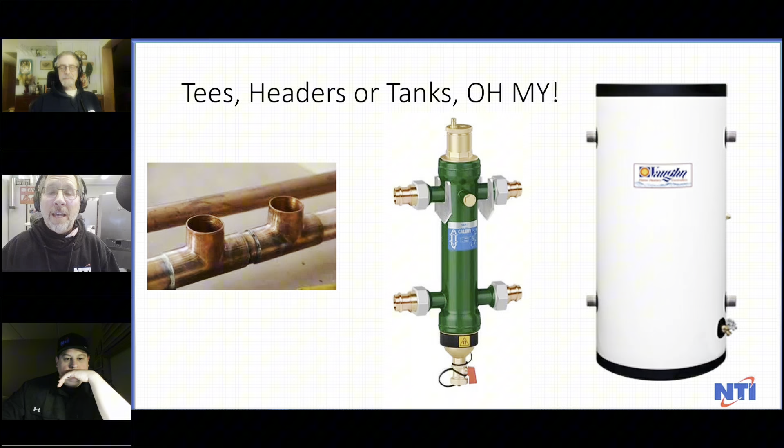Exactly, but in reality folks, it's not these types of T's, headers, and tanks. It's actually these kinds of T's, headers, and tanks. So tonight we're going to dig a little deeper into why and when you'd like to use two closely spaced T's, why you'd want to use a low loss header, or when should you use a buffer tank. Because all of them fit everywhere just at the right time, right? So that's what you have to decide as an installer/designer and system supplier. You got to do it.

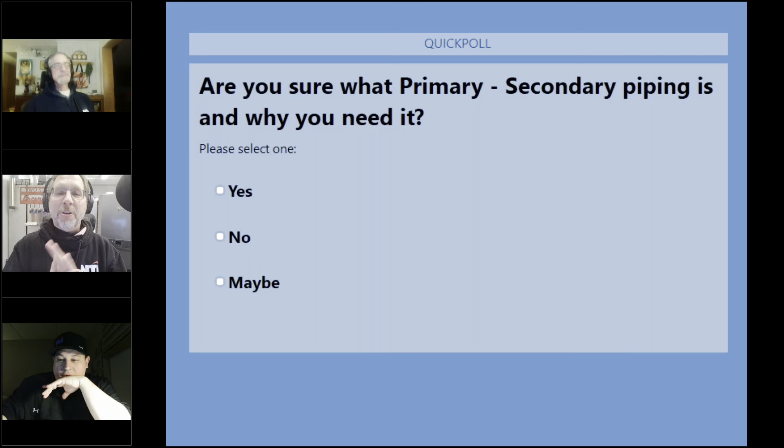Wow, cool, excellent. So we got a ton of yeses, right? We got a ton of yeses, but we got 30% basically that aren't sure. Good. Close that poll, would you, Jason? Yeah, I would close, while you're trying to find your music, just close the poll, would you, for God's sake? There we go, I was answering a question. I ain't worried, but you need to convince that other 34% why they need to. So that will be the task at hand tonight.

So let's take a look now. Tonight we're going to be talking about primary, secondary, and how this all started and where I was introduced to it, and not even know I was introduced to it. So you read the book. But the goal of your T's, your low loss headers, and your buffer tanks are to create a primary secondary circulation so that your boiler can have one flow and your system can have another, and the two not intertwined with each other except for when we're transferring the heat out to the system.

So now let's look at the way we used to pipe things here. So here's a standard atmospheric boiler, a standard atmospheric expansion tank, a standard scoop that we know had at least 18 inches of pipe before it. We had the pumps on the return. We had the check valves on the supply.

And these, notably, when I got into this business, were as big as a small VW or a VW bus, actually. We took those huge boilers out and we put in what's considered large boilers today, which would be your standard 4, 5, and 6 section cast iron boiler weighing in at about 800 pounds apiece.

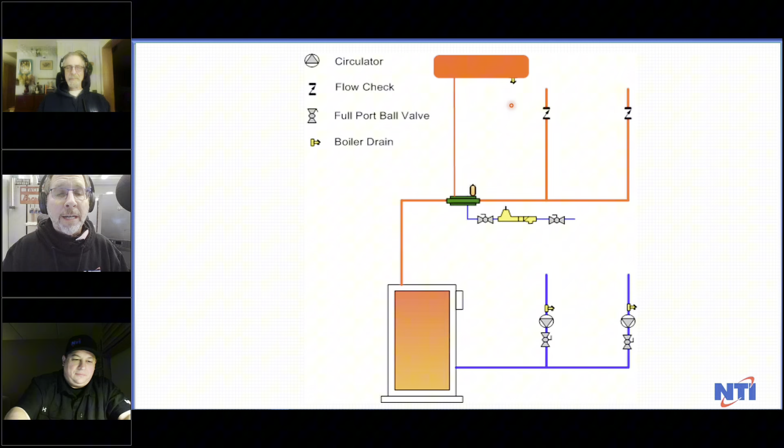And we had a problem because the systems had 3 and 4 inch mains, all the cast iron radiators, and had a ton of radiators and water in it. And that water coming back to the boiler would create condensation, which you don't want a cast iron boiler to do, because our return water could never get over 130 degrees to allow the boiler to get out of condensing mode. So this is a small problem.

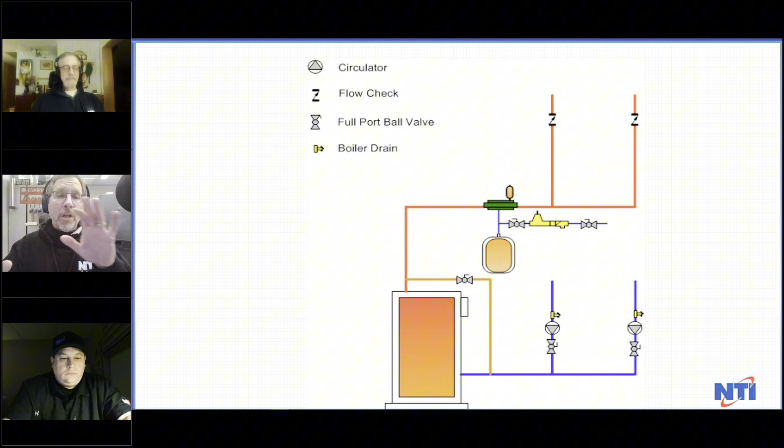So what we did back then, and you guys may know, is we put in a bypass. We simply put in a bypass around the boiler so that a portion of the water could go by the boiler and a portion of the water could go through the boiler, but the boiler could get up to 160 to 180 degrees, get out of condensing mode, and supply that temperature slowly to the system, so the system would heat up slow and come to temperature. So this was the actual early days of primary secondary without using pumps, because with a cast iron boiler you didn't have to maintain any kind of flow rate.

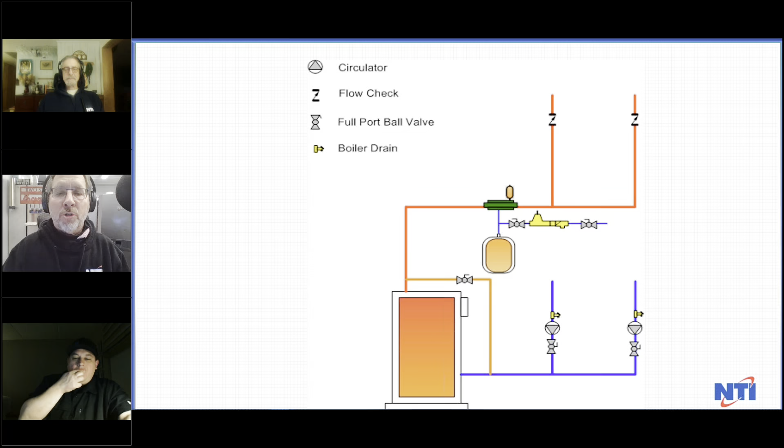Today we have to. But then we did something really weird after that. So then along came radiant heat and outdoor reset and Tekmar controls and all that cool stuff in the 80s. And we had to come up with primary secondary. So we came up with this for primary secondary.

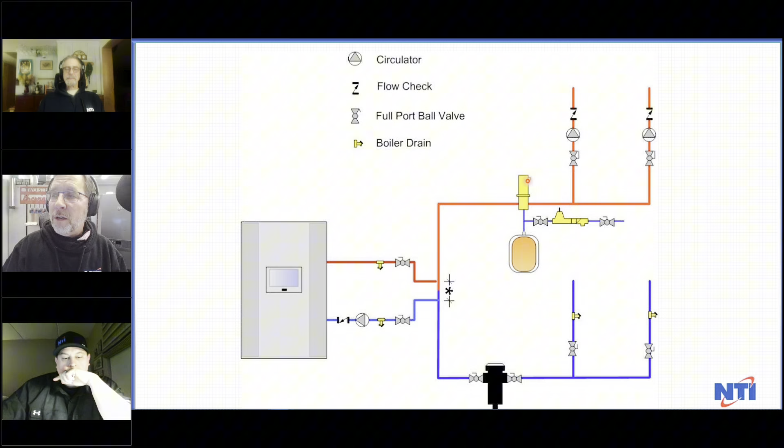We save you a pump, and now we just pump the boiler into two closely spaced T's and off to your system. Here's your two closely spaced tees, which I just addressed the distance apart. You can see I've now added a magnetic filter to the return, a diaphragm tank, a nice fill valve, a microbubble air absorber. I put the circulators on supply because I know that's the best place for them. If you have a question as far as why I placed the pumps here and on the return, yes?

There is a question, and I don't know if you're getting into it, but there's a question from Bob Clark about why Lars shows a ball valve between the two tees. I know you'll probably cover that, but I just wanted to ask. You'll just have to wait a second, young man. You'll just have to wait a second. I didn't know if you were getting there. I'm just saying, hold your horses, little boy. Hold your horses.

So anyway, here's how primary secondary is done today, where our circulator for the boiler makes the pressure drop and pulls the water in, but the circulators on the system don't affect the boiler flow.

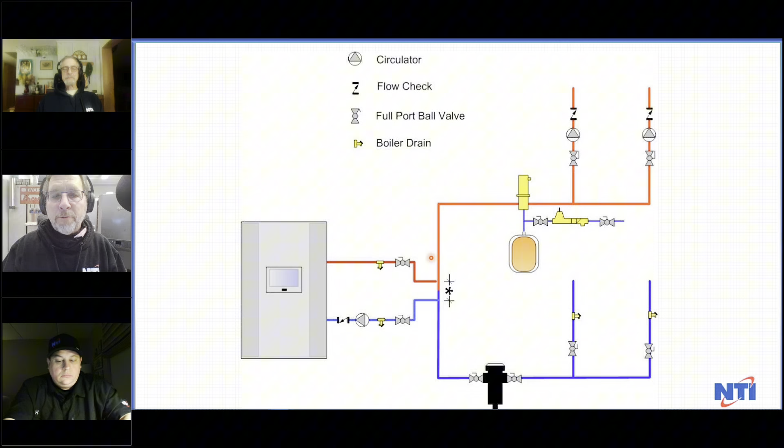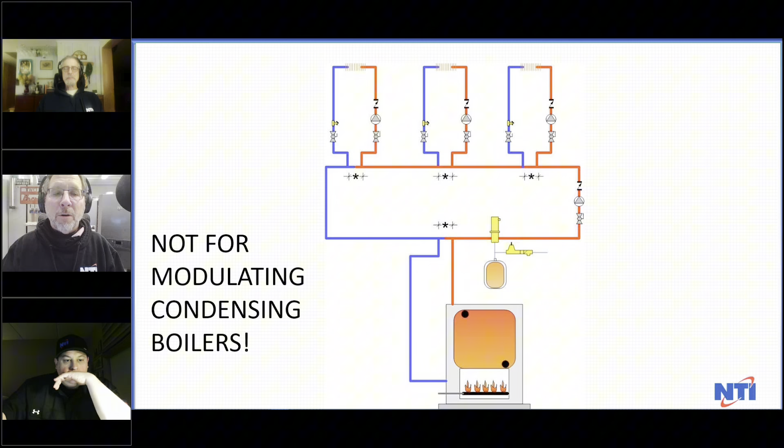I even tried at 12 inches to put gravity traps in, meaning I dropped the pipe down off the main header, dropped it down 18 inches, went across and came back up, and I still had flow, proving that it was flow, not gravity. So 4 pipe diameters work, which is why we're always talking about 4 pipe diameters.

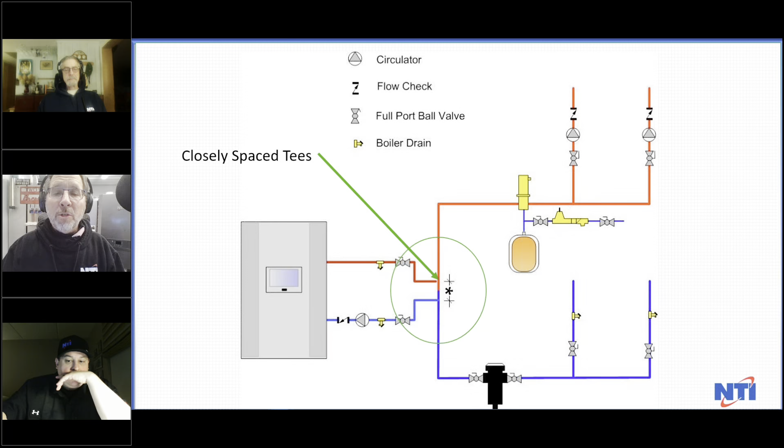So there's your closely spaced tees that we're always talking about. You can see now there's no primary pump - there's a boiler pump and there's system pumps. So when we talk about what pumps are whose, please, we want to know if you have primary or secondary, but we want to know what pumps are where.

So you talk about valves in between, and here's 3 different kinds of closely spaced tees you can buy. Of course, you can buy this simple Nibco sweat tees, put them in, off you go, nice and cheap and easy. So far, so good.

Then, down below, you have the Webstone with the valve in between, and the reason for the valve in between is so that we can power fill the boiler. We can turn that off and force water through the boiler to purge it and get it out to the system. With us, we put a valve on our low loss header because that way you can use the internal pump to pump the system if you wanted to, if you had less than 5 gallons a minute at 9 feet of head. But that valve is there so you can purge the system.

And on the top right-hand corner, you see that I used the closely spaced tees with the valve in the middle, and of course I put the purge tees on the return, going with the expensive Webstone. So just to give you an idea.

Now, when we start talking about flow on closely spaced tees, I've left a little bit out here. If you notice on all these pictures I've shown, the bottom left doesn't show you any piping, but on the top right-hand side you can see there's a distance of straight pipe to either side. People often ask how much straight pipe should I have before and after. Personally, I prefer 18 inches of straight pipe before coming back from the system, before the return tee, and at least 9 inches coming out.

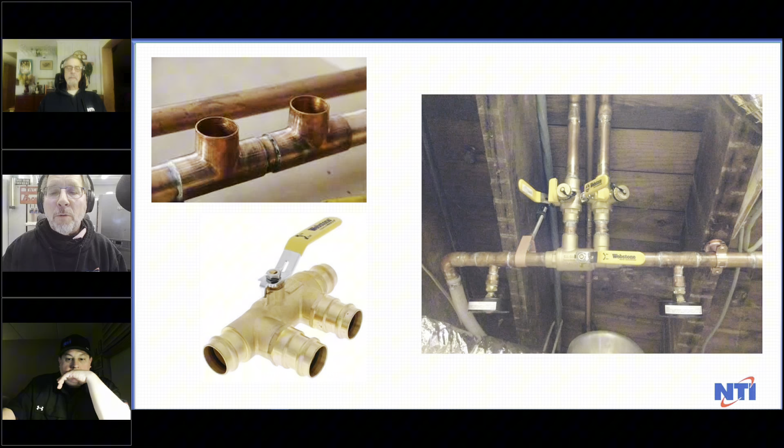I don't know if you know this. When water comes through an elbow, the same... Where'd you get that drawing? Would you let me do my explanation? Why? That is perfect, that's perfect. Okay, well shut the front door, will you? This is courtesy of heatinghelp.com. Read the bottom of your screen, will you? Of course it's perfect, he wouldn't have put it there if it wasn't.

So let me get back to why we want that distance. You got some questions you got to answer too.

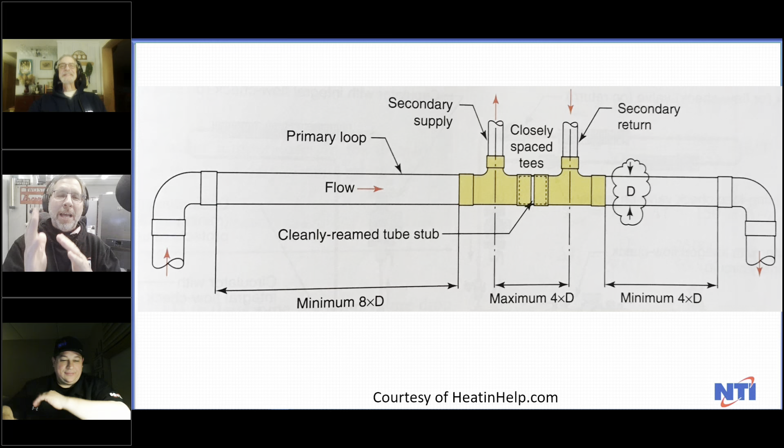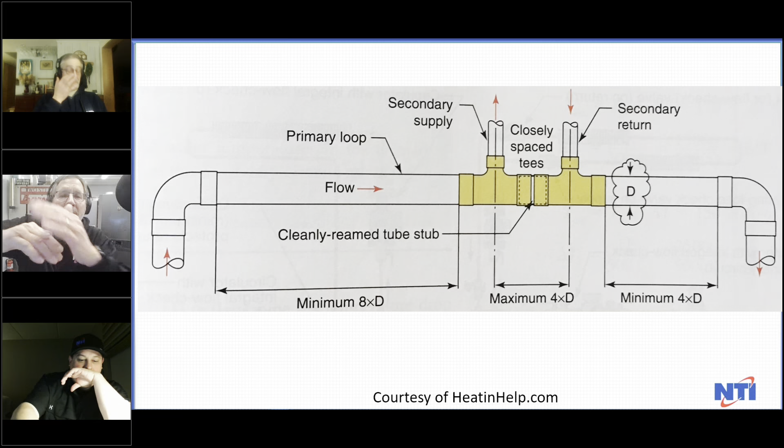When a fluid comes through an elbow, and I don't care whether it's air or water, whatever comes in goes out, nothing's left behind, right? Well, the problem is the velocity on the outside is moving much quicker than the velocity on the inside of that turn because it has to keep up. When it comes out of the elbow, it's twisting, and the two velocities are creating a twisting motion going through. Think of it kind of like a chocolate and vanilla swirl at Mr. Twisty in the summer, right? That's what it looks like for about the first 8 to 10 inches.

So in this picture, it doesn't use dimensions like 18 inches and 9 inches, it goes back to pipe diameters, where our closely spaced tees need to be 4 pipe diameters apart. So if it's 1-inch tubing, it should be 4 inches apart, center to center. But if the main is 2-inch diameter, it's got to be 8 pipe diameters away, or 16 inches, before you get to the first tee in the direction of flow. And coming out, you need to be a minimum of 4 pipe diameters from that. So this is the ideal way to do it.

I can't tell you how many times I'm on a job where there's an elbow right at one tee and an elbow at the other going to the system. Even if the tees are 4 pipe diameters apart, the system pumps start to help the boiler pump, and now you're no longer hydraulically unlinked. The system flow starts affecting the boiler flow, and you get low delta T's, and the boiler thinks it's revving up too much, so it kicks back, and everything starts to fight each other. You get overheat situations, no heat situations, low delta T situations, all this trouble, not because of the boiler, but because of the way you piped it.

I watch guys who do this, and they turn the circulator up inside the boiler, which is exactly opposite of what you should do when the system pumps are adding to the flow of the boiler.

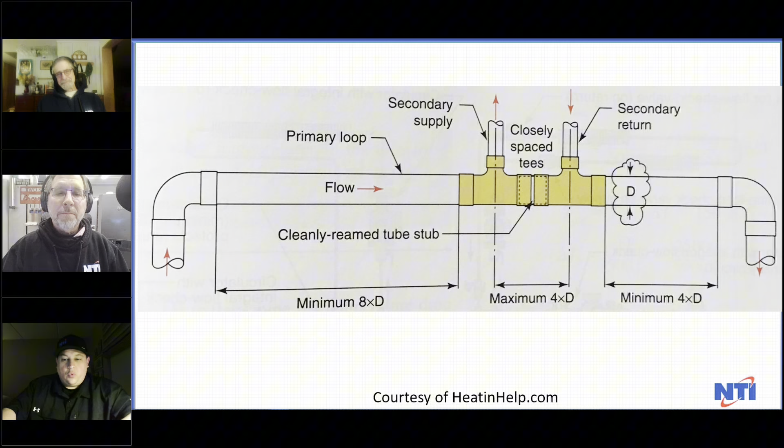The only way that's going to happen is if you follow the rules, because if you locate that elbow too close to the tee, there's turbulence. This is all about creating no pressure drop, not putting it in an area where there would be a large pressure drop, letting the water maintain its own temperature difference and flow.

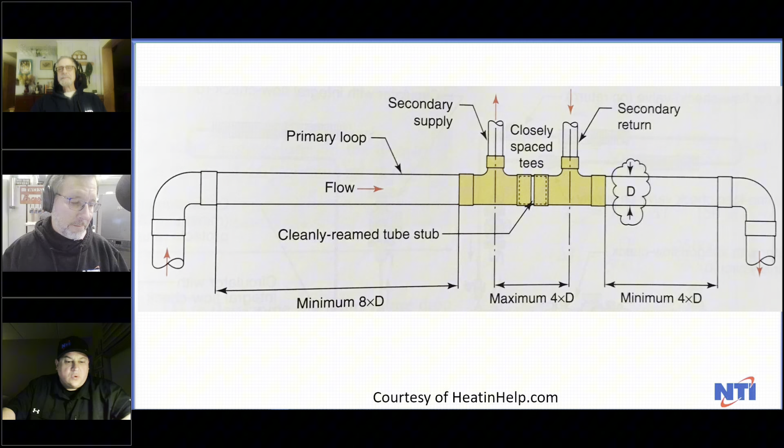Tom Donaldson had a question - taught in Navy school always to put the pump pushing through the loop, not pulling. I'm a little lost there - pushing through the loop? Navy guy always pulls the loop. What's the advantage of pushing through?

Putting the pump on the return instead of on the supply is what I'm getting out of that question, same as what Mike had asked - where do you want to put the circulator, supply or return? You guys always want to put it on the supply.

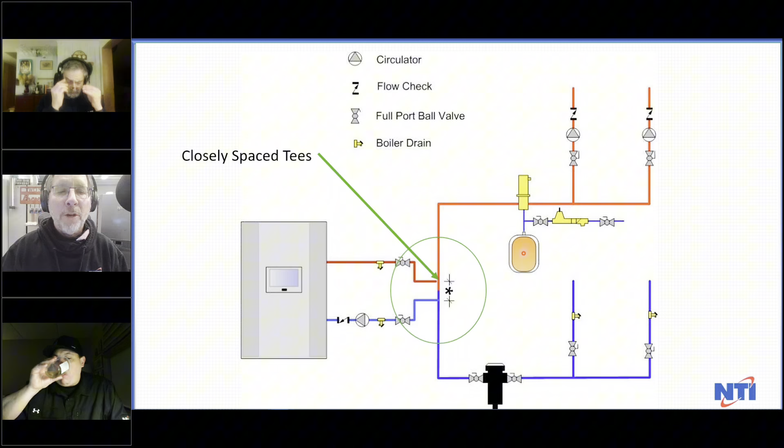Pump away from the expansion tank, all the time. We talked about how a circulator works by increasing pressure on the outlet and decreasing it on the inlet. But we can't compress water, so our expansion tank is our point of no pressure change - your system pressure is created right here. If you're running a 12-pound system, you want 12 pounds of air in that tank; if 20-pound system, 20 pounds of air.

So off the circulator goes, it increases pressure on the outlet, comes around still increased, gets to here, says uh-oh, it's 20 pounds - and it drops in pressure, so now you have decreased pressure from here to the circulator.

Every commercial job ever specified has had the circulators on the supply, except one I was on where they screwed up the drawings, admitted it, and had to pay in errors and omissions to move their two base-mounted pumps to the supply - because the system wouldn't work in an 8-story building with the pumps in the basement on the return. It was dropping pressure so much at the top that it kept getting airbound and not flowing - just sucking air up there. You want to increase the pressure whenever you can, not decrease it.

Did that answer his question? I texted him, I emailed him - having a tough time talking tonight, Jason, maybe that Tito's isn't working for you, pal. No, I emailed him to make sure we were asking this right because I couldn't understand his question - I thought, like Ted, he was talking about the return.

But now we got a couple more questions that came in.

Why not put the expansion tank on the return? This question is from Timothy. Why not put the expansion tank on the return?

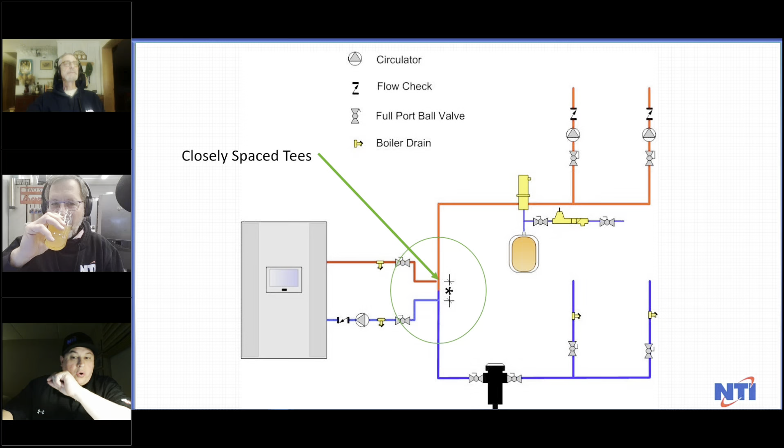If you put the expansion tank on the return, you need to understand, depending on the location of the three-way valve, you may isolate that expansion tank. Not in this particular application with closely spaced tees. Just remember, no matter where you put it, the circulator always has to reference that expansion tank, so don't pump into it, because you'll change the pressure.

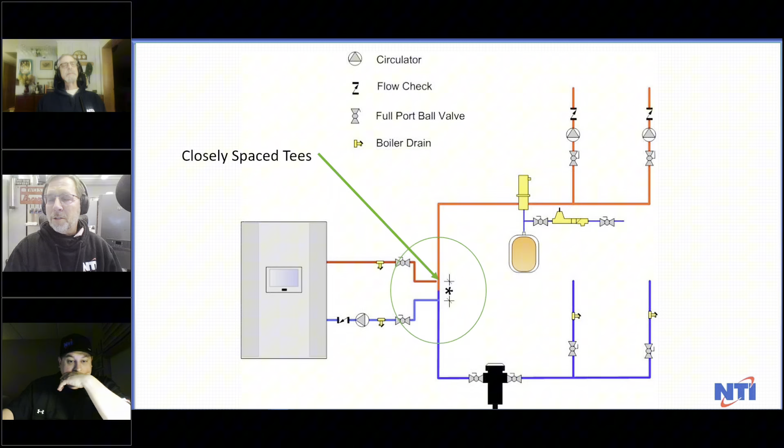So the next reason you want to put the expansion tank where the air separator is, on the hot side, is because gas cannot hold onto a hot liquid. It dissolves more, better, and deeper into a cold liquid. So on the hottest side is where the air will come out easiest. You always want your expansion tank there because you want it to be the point of no pressure change, and that's also where you want your fill valve.

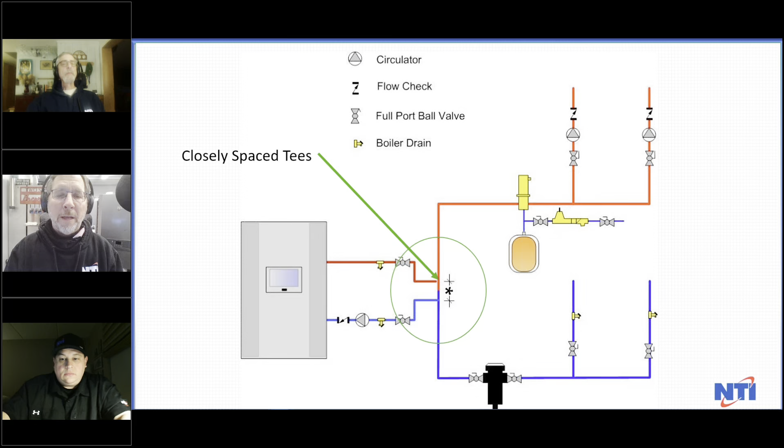If we want to get deeper into the positioning of fill valves and expansion tanks, that's a whole different class. But it's a good question.

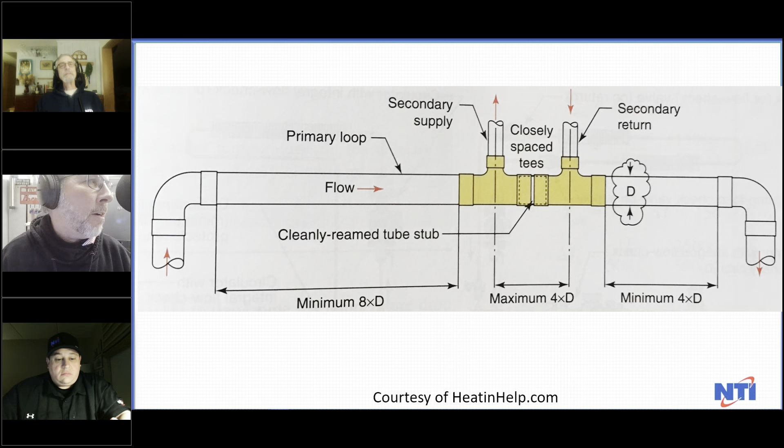I suggest Dan Holohan's book on pumping away. And to answer the question, the tea is trying to help out my sore throat from talking for a couple days. But that's a great question, Steve.

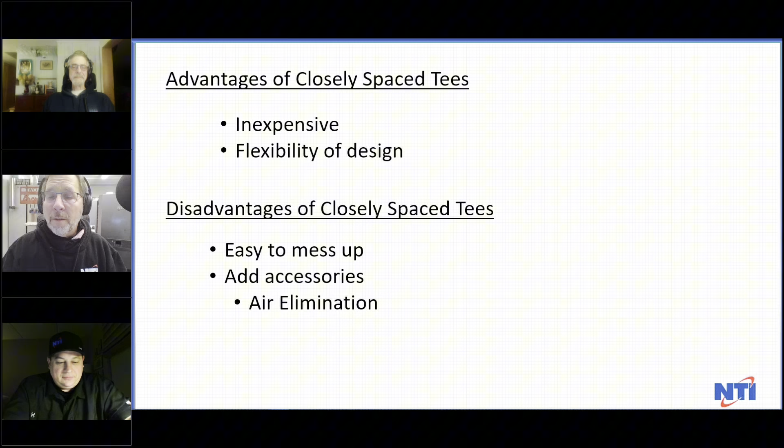They're easy to mess up - you don't put the piping in correctly, and you don't realize you've screwed up by not having the right pipe distances. You have to add accessories like air scoops, dirt separators, and boiler magnetic separators - things like air elimination, magnetic separation and dirt collection aren't part of it. And it can lead to boiler short cycling, which we're going to talk about in a minute.

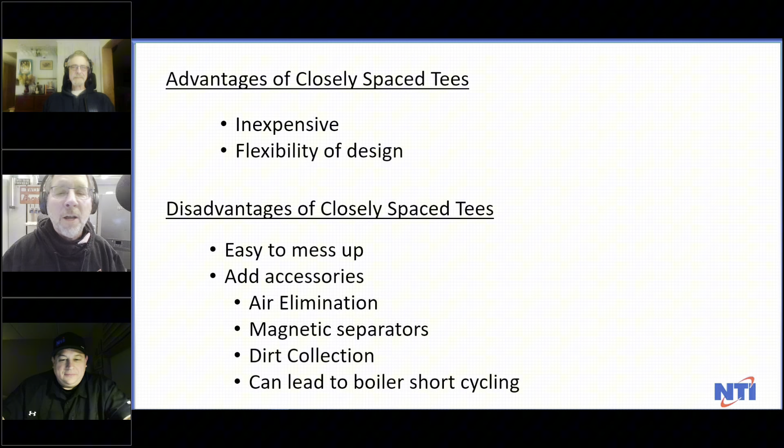Poll question number 2 has been launched: do you keep the proper distance before and after your closely spaced tees? There are three choices - always; until today I had no idea about spacing; or if I have room, and we'll take the consequences.

Okay, here we go, 45 seconds. I'm trying to play Jeopardy with you, but it's not working. You never did find that music, did you, Jason? Oh, I got it. There you go, please help me God. Is the minute over yet? Okay, it's over. Jason? All right, who's the lady who does it? What's her name? Don't even try.

So 65% always, 19% said until today. I had no idea about spacing, and 16% said if I have room. Cool, okay, yeah, and that poll.

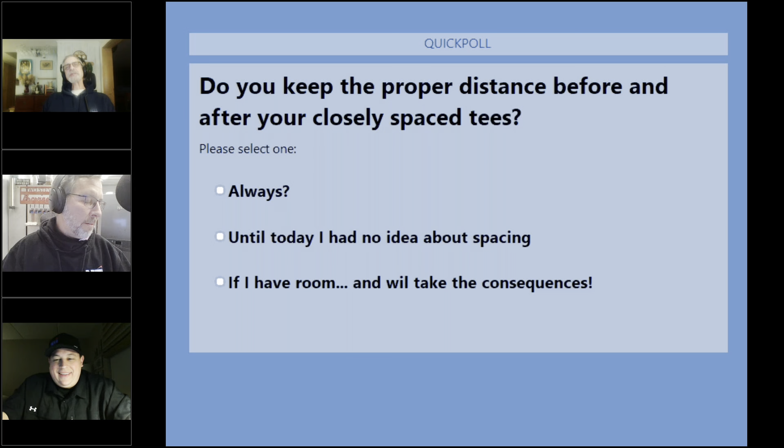The one confusing thing about the poll is that the 65, there was a question mark after always. Seems like the kind of thing you need to be sure about or not. Well, you could buy a manifold, you could get a manifold. Hey, I was not drinking or just coming back from Foxborough when I made those questions. Okay, so let's not go there.

That's right. So we just talked about closely spaced tees, and now I want to talk about low loss headers. Notice the system has really not changed much.

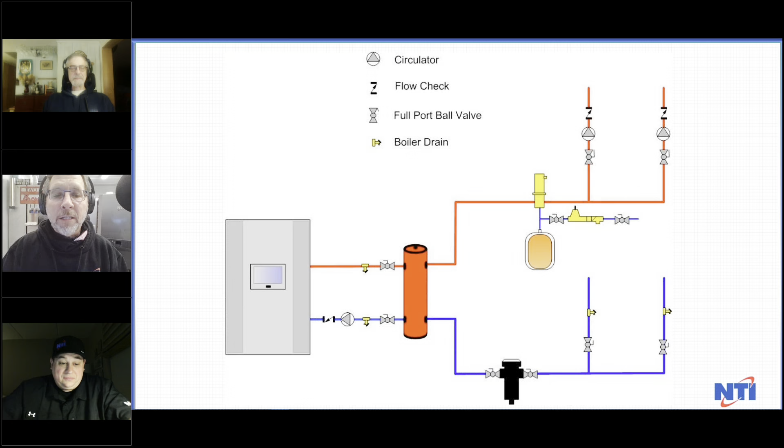But a low loss header gives you so much more flexibility. One, if you get a large low loss header with a large diameter, it will add gallonage to the system so you can help prevent short cycling if you have a microzone. Two, it can give you air elimination. Three, you don't have to have distances before or after it because it's built so it can go in and out correctly. So now all you need to know is that this is vertical, and attach your pipes going into it. There's no distances needed between elbows, none of that, but there is a cost problem, isn't there? So there's your low loss header.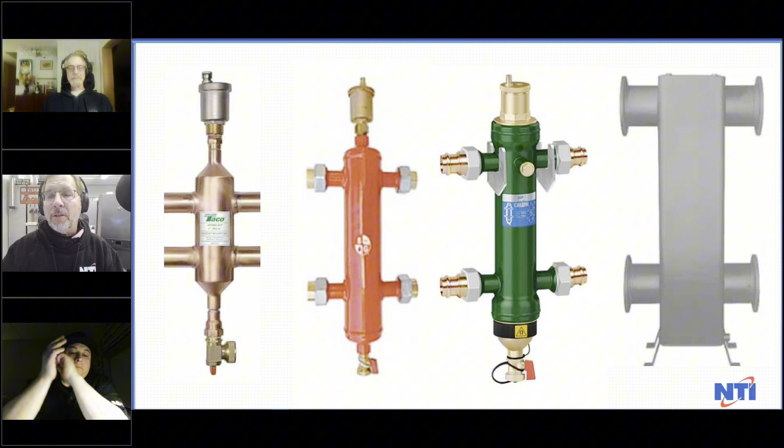Of course, there are some difficulties with it. Poll question number 3 - here we go, and there's some good questions on it. Maybe we'll take a look when we launch poll questions. Have you ever used a low loss header? Yes, no, or hell no?

Too much money. Please, Jason, you said you wanted it, I'm giving it to you. I love Bill McKay, see some of the stuff he puts in there. I'm sorry, I shouldn't be laughing. And Bob Clark, of course you can build your own low loss header, for God's sake. Hell yeah, it's cheaper, that's the question I like.

Right, it's how much does how much does 2Gs cost you? Well, that was listed as one of the advantages, that it was a lot less money.

Yes, all right, there we go, time's up. 59% say yes, they have used a low loss header. 38%... well, the numbers just changed, some of the no's became yeses.

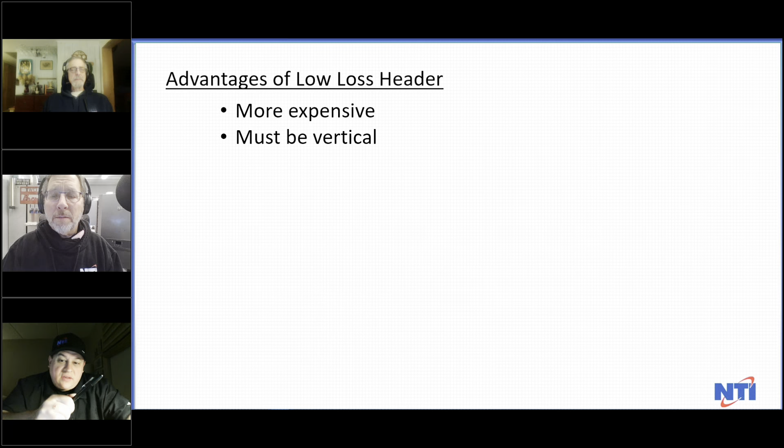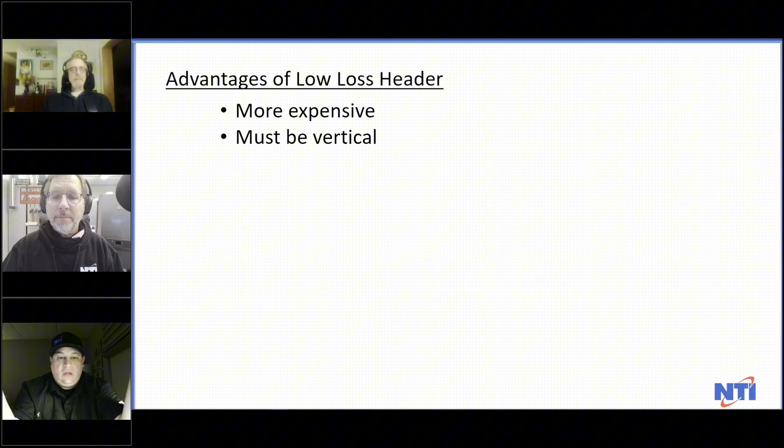So let me ask you this question. As a contractor, Ted, and Steve, you as a wholesaler and ex-contractor, what would you rather do? Put a separator in with a magnet and the whole kit and caboodle and not go back for a problem when the freaking boiler is plugged solid, or have flow issues because it wasn't piped correctly. That's all I'm saying about hydraulic separation.

Well, to answer your question, Jason, it depends. To answer exactly your question, it depends.

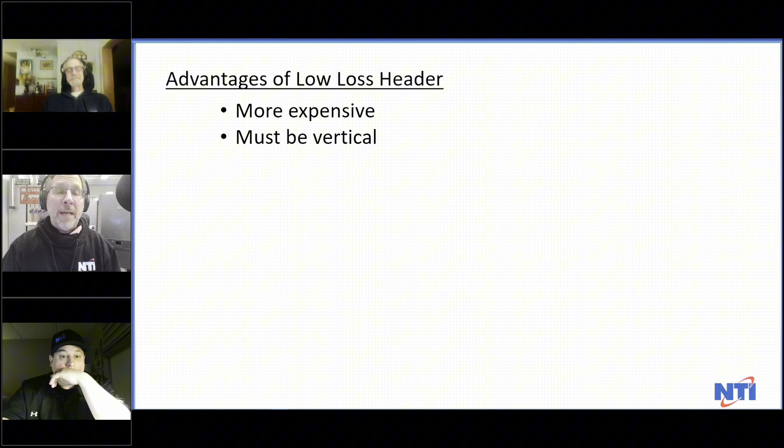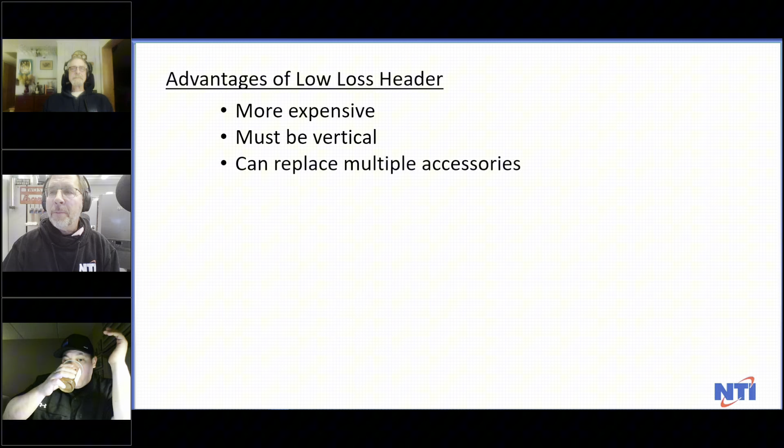A low loss header must be vertical so the dirt can separate out of it and the air can go up. That's common sense. All low loss headers have an air vent on them. Doesn't mean they're a microbubble air absorber, it just means they all have an air vent that takes out air that gets into the low loss header. It can replace multiple accessories, like going with the SEP 4, the air scoop, the dirt separator, the magnetic filter. It can help with short cycling if you build a large one. You could use something out of giant square tubes and build a low loss header that's somewhere in between a low loss header and the tanks we're going to talk about. You could do that and it could help you with microzoning.

The disadvantages of a low loss header: money. It's simply money and design. You've got to have a place to put it.

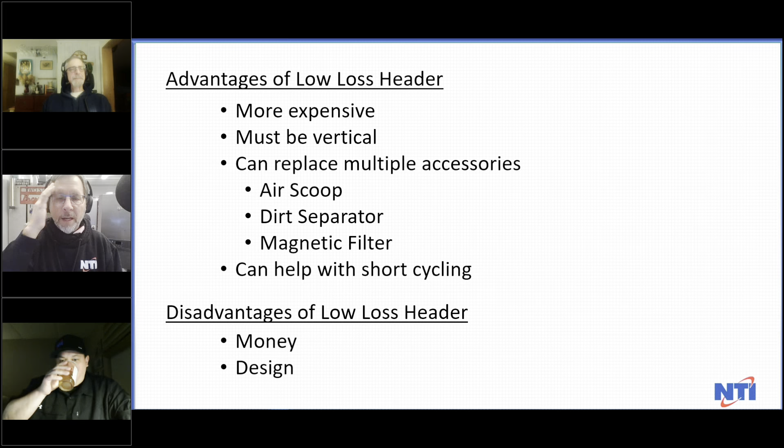That's a value proposition, though. In other words, if you believe in it and you can articulate why you believe in it, people will buy it. It's always about confidence, as we went through two weeks ago, right? Yep, sell the job and make it right. So you have to believe, first off you have to believe that it's the right thing for your job. Absolutely, without a doubt, Ted.

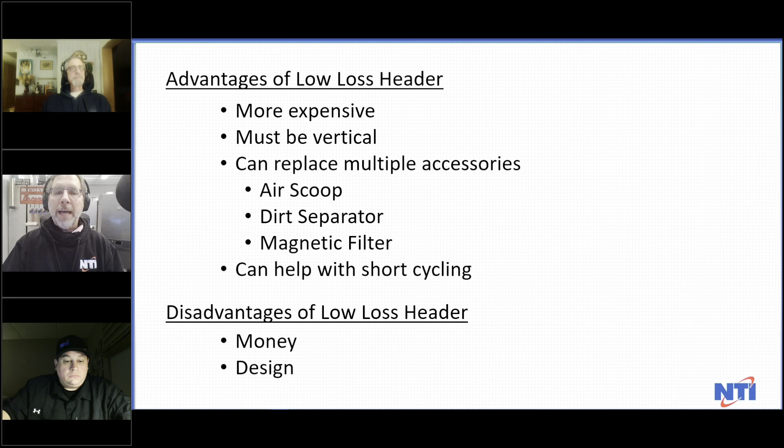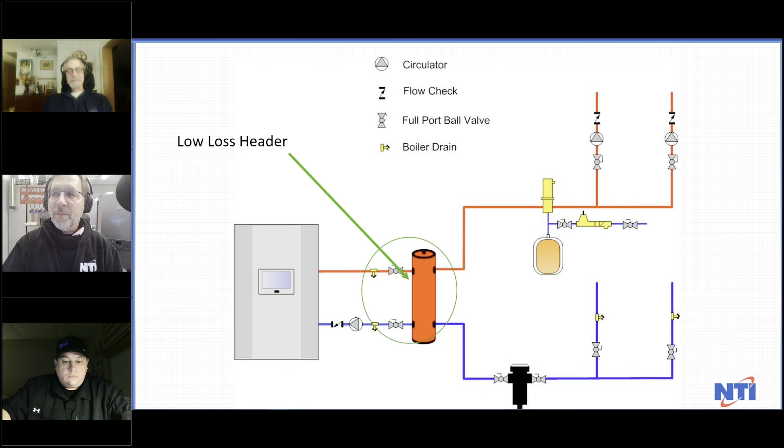You can see I still have the magnetic separator coming in. I left the microbubble air absorber on, though it may not be necessary. I helped a company many years ago, they didn't think there was a need, but it was funny. They came out with tanks and were only going to offer them in 40, 80, and 120 gallon sizes because that's the size tanks they had. I said no, I went 10, 20, 30, 40, 50, 80, 100, and 120.

I want little 10 and 20 gallon tanks. And they said, why? I said, well, if you do the figures, you can see why.

It was funny, I went to go find the formula on the Vaughn site, and of course I had to go to my Siegenthaler book because it wasn't there.

They have these with electric backup in case your boiler takes a shit. You can actually have an electric storage tank sitting there on top of it, which blew my mind.

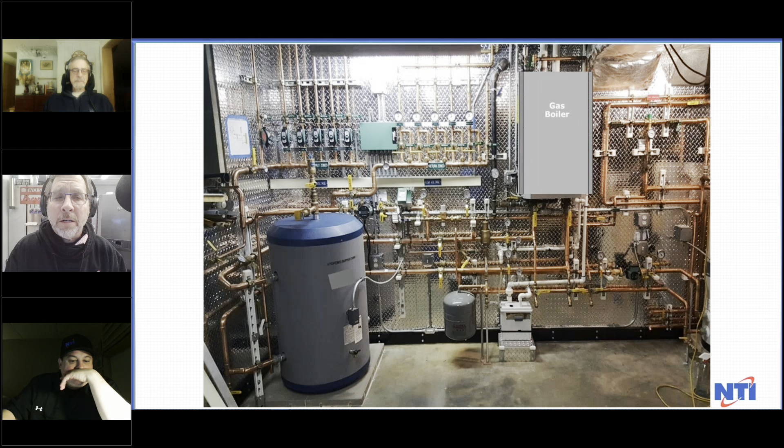And if you have a boiler that doesn't have a 10,000 volt igniter with a very heavy ignition system, like an NTI with 10,000 volt transformers and heavy igniters, it wouldn't take the short cycling very well. And it's not good on the boiler as a whole to keep banging on and off, so it wears everything out.

So here's the buffer tank, but I mentioned that I was pushing for the 10, 20, 30, 40, 50 gallon sizes, and people say, well why? So now we have to do the figuring in.

Hey big guy, before you get into any further, I want to just shout out, this is a good question, it goes back to the SEP 4. Charles Mason, love the guy, Charles Mason says, listen, I use it when I don't have a lot of room. That's a great point. When you don't have a lot of real estate, that's when you may want to go with the SEP 4, just throwing that out there. That's a good question, it's a really good application. Great application, and it goes back to Ted and mine's answer.

It depends. So, all right, so now let's look at how you size your tanks.

I don't know what emails I'm getting, but I'm going to have to find out later. How to figure out what size you get.

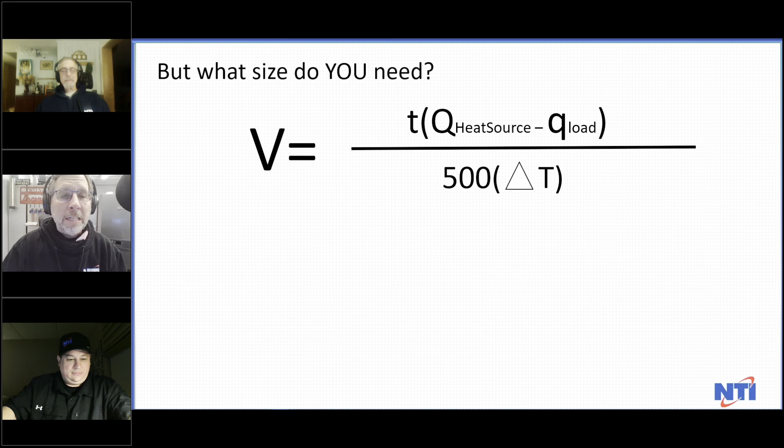So this is right out of the Siegenthaler book, page 665 I believe it was, in the 3rd edition. How do you size a buffer tank? And here it is, so it's volume, right?

Volume, that's the size of the buffer tank we want to find out. T is the desired amount of time, the small t is the desired amount of time you want the heat source to be on, meaning actually firing. Q heat source is the heat output required of the heat source.

Q load is the rate of extraction from the tank in BTUs. By the way, Q heat source and Q load are both in BTU. Delta T is the temperature of the tank from when the heat source is turned on to when the heat source is turned off. So we want to find out the volume.

We need to know the time that we want it to go on, we need to know the heat source and the BTU output of that heat source, we need to know the load, and we need to know the delta T that we want to run, right? So far, so good.

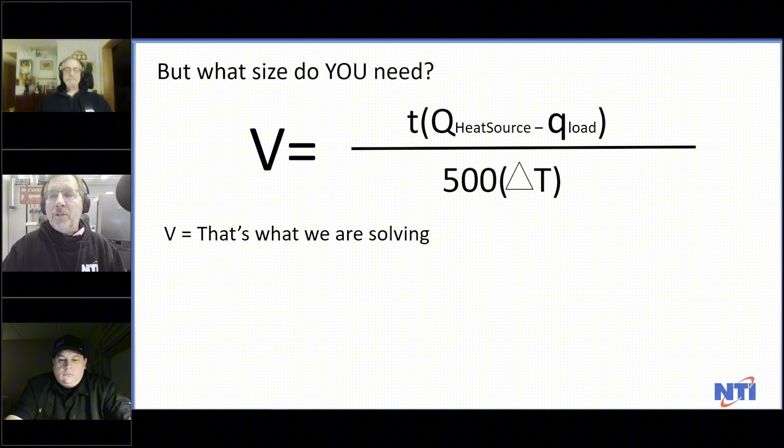So let's do some problem solving on that 200,000 BTU boiler, right? 200,000 BTU boiler, volume's what we're solving for. T for time, I want a minimum of 10-minute runtime on my boiler.

Q heat source, that boiler would start up at 80,000 BTU, so I picked that as the starting point, not its minimum modulation, which I'll address here in a minute, but I'll go with the starting point of that 200,000 BTU boiler, which is at 40% or 80,000 BTU.

The load of that microzone was 3,000 BTUs, and the delta T, because all of our hydronic systems are sized to a 20-degree delta T, I just use that. Now, that tank could have been sitting there for a day, and it could be 70 degrees going to 140, it could be a 70-degree delta T, which would just give us a longer run time.

And that's okay, that's okay. In a modulating boiler, that means the boiler will modulate up out of 80,000 BTU.

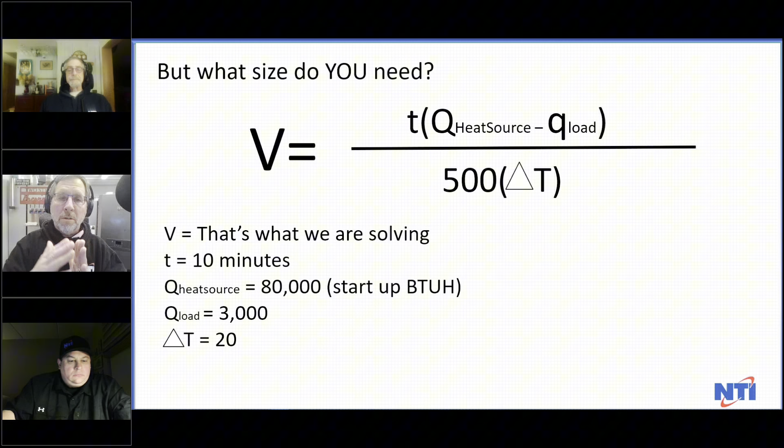But let's look at this as a simple equation at this point. If we take the 80,000 BTU that we have on the boiler at startup, 10 minutes was our time, 80,000 BTU was our startup BTU. Less 3,000 BTU, we're going to divide that by 500 times 20. So far, everybody sees where I got those numbers, I hope.

Now let's do some arithmetic. So we got 10 times 77,000 divided by 10,000. And if we do a little bit more, that's 770,000 BTUs divided by 10,000. And if you wipe out all the zeros, like Ted and I were taught in 4th grade, you cross out the zeros, you come up with your answer, and we come to find out that that's a 77-gallon tank.

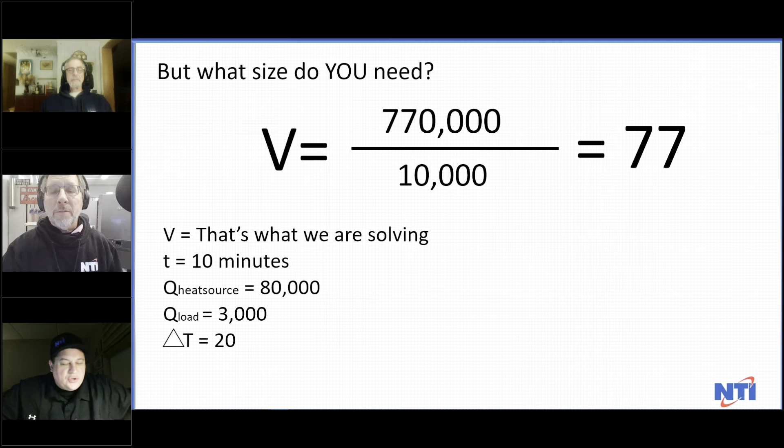Did they really teach you guys that far back to cross out the zeros? Unfortunately, yes. I watch my grandkids doing this on their arm, and I have no idea what they're doing.

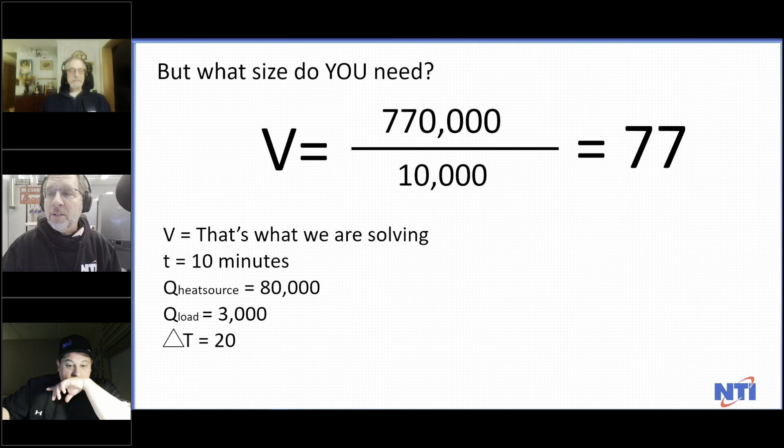Anyway, 77 gallons. So if I base this on the startup BTU, not taking modulation into account, just the startup, I find out I need a 77-gallon tank, and we look at the Vaughn chart, and an 80-gallon tank is the size I would use. Now, I differ with this thought process. I kind of think that if it was an atmospheric standalone boiler, a solid 80,000 BTU, I could do that. But I also know that at startup, you're at that startup BTU for a very short time.

So let's look at this from another viewpoint. Let's now look at it with 20,000 BTU, which is our minimum modulation on a FTVN 200 or 199. So now let's solve this for 20,000 BTU, not 80,000 BTU.

Let me go back here, I apologize for doing that. It's 20,000 less 3,000, the load hasn't changed at all, so we know that's 17,000. We're going to multiply that by 10, and still divide it by 10,000 because 20 times 500 is still 10,000. So now we got 170,000 BTU divided by 10,000, which is now all of a sudden a 17-gallon tank, not an 80-gallon tank.

And we find that sitting right here, and we've saved our time, we've saved ourselves time and money for the price of the tank. We're still getting our 10-minute run time, and we're still providing all the heat we need for that microzone without short cycling the boiler. And this is what our job is, folks: we're giving them dirt separation, air separation, hydraulic separation, and buffer all at the same time. And it's a lovely way to do it.

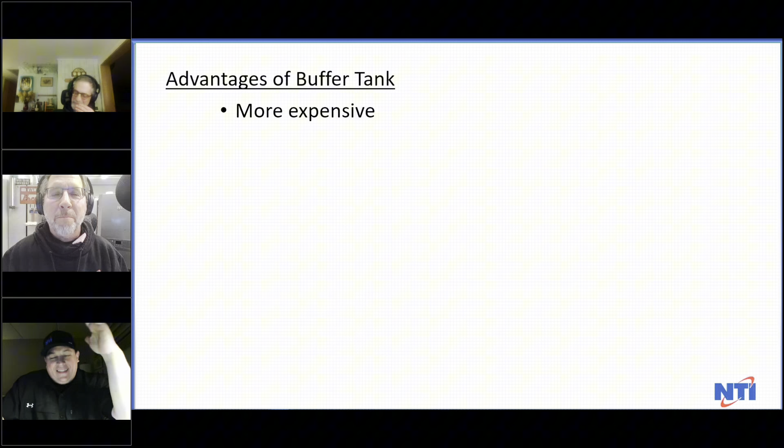So advantages, takes it away, advantages of a buffer. We're adding a whole new meaning to the word boiler porn, right? Anyway, let's keep moving on to another topic here.

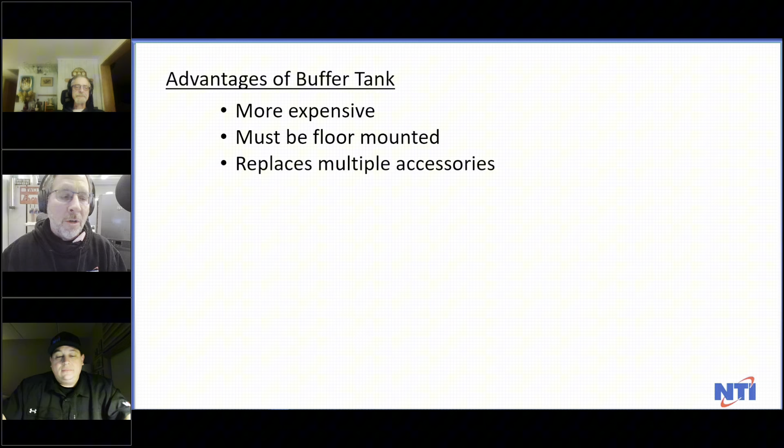Buffer tanks are more expensive, of course. It's going to take up more space. They must be floor mounted because they're going to weigh a lot. They replace a lot of accessories, so it's going to cost you more money. It's going to save you some, just like a low loss header is going to save you some if you get the right one. It replaces, of course, the air scoop, dirt separator, and magnetic filter. It eliminates short cycling.

So were you going to say something, Jason? No, I just looked at some of the questions. Richard Szymanski says, I use them on chillers. He's 100% right, it's a big application for buffer tanks, for the same reason really. Yep, it's huge, it's the same concept.

But Frank's wondering about magnetic separation on buffer tanks, and it certainly isn't bad, but you have such a large volume, and with virtually no real flow to create turbulence through there, that air is going to rise and sediment is going to fall. Frank, I agree with you in that respect, though. I would still use a buffer tank, so you don't load it up with all that magnetite in the bottom of it, because there's really no way to flush it out. I would put in a magnetic filter before it, so you're not loading that up with all the magnetite in the system, because it will collect there.

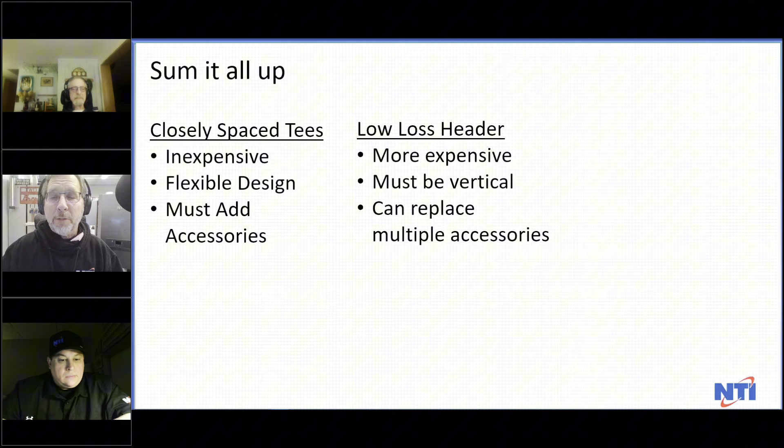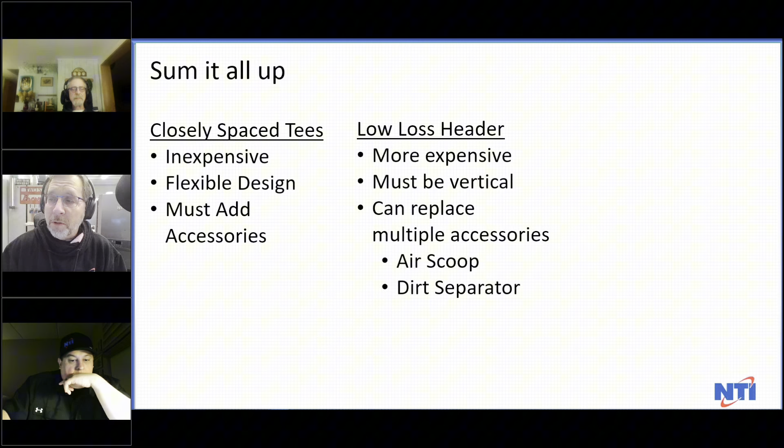Okay, so just to sum this up, we look at closely spaced tees. They're inexpensive, flexible in design, but you must add accessories. How is it piped? Low loss header, more expensive. They have to be vertical so they can release the air. They can replace, if you buy the right one, multiple accessories like an air scoop, dirt separator, magnetic filter. And they help with short cycling, but they don't eliminate it because there's not that much volume. I've never seen a 10-gallon low loss header, because if I did, it would be called a buffer tank.

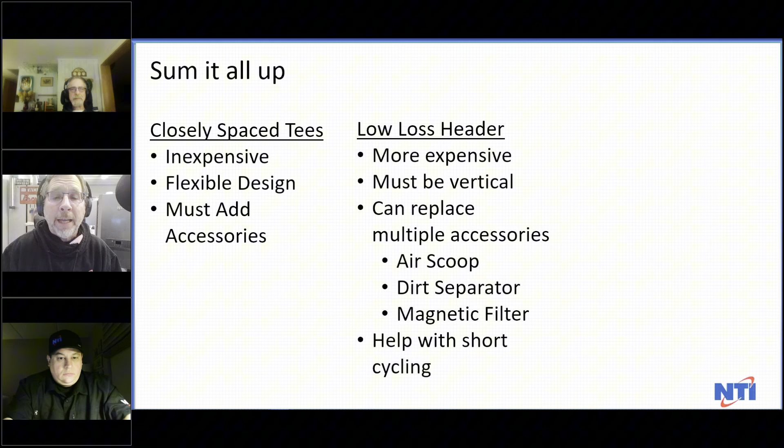Okay, good. And then a buffer tank. They're more expensive, of course. They have to be floor mounted. They take up space, but they replace multiple accessories. I don't necessarily agree with my own writing that they take care of a magnetic filter, but it will settle out. A magnetic filter is still good to get rid of it totally. And it eliminates short cycling.

So gentlemen, that is my argument on buffer tanks, though I use more low loss headers in my life than I have buffer tanks. But I designed buffer tanks for a reason when I was a wholesaler designing systems nationally, designing radiant heat systems. I've been on a job that you designed - oh yeah, radiant system, you know what I'm talking about. And again, we circle back to the magic answer being: it depends. I've used all three of these, and sometimes you might use them in combination. For instance, you might have closely spaced T's elsewhere in a buffer tank system. Because all of these are various things that can be employed to design the proper system, and that's why it depends. Absolutely. And just to answer one question that just came in, the buffer tank's always on the supply.

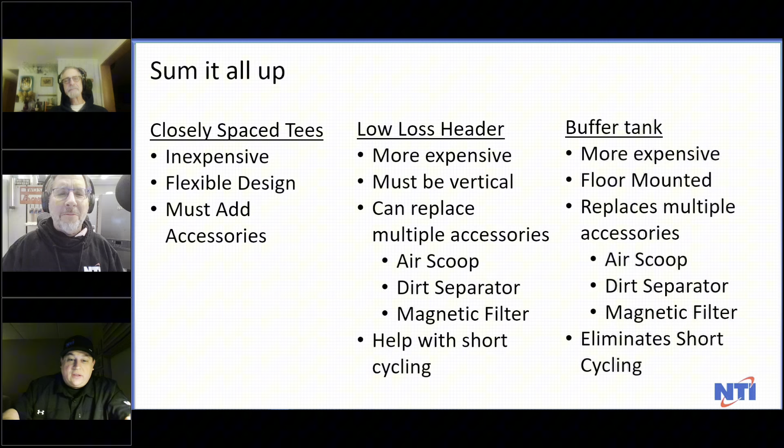I don't want to tell you my analogy of a buffer. Wait, the buffer tank's always on the supply. The buffer tank is in between the boiler system and the heating load between them. Well yeah, but what I'm saying is, look at Bernie's question, and maybe I'm...

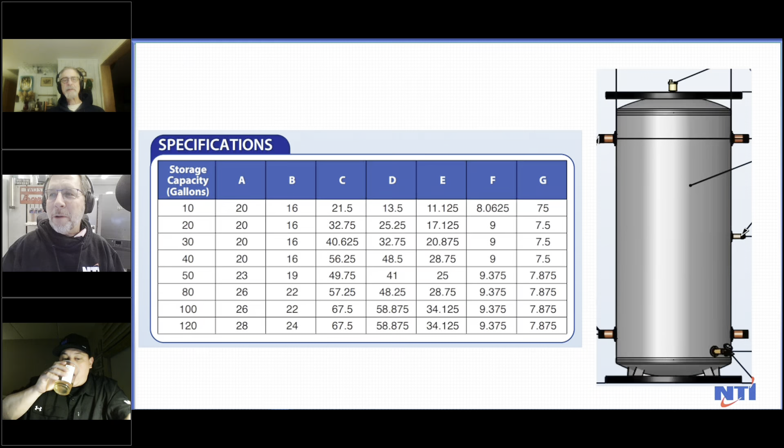Let's go back to the piping of a buffer tank here for a second. Now having said this, if you were supplying an indirect tank in this system, you would want to take it off before the buffer tank. Hold on, but the buffer tank is always in between the boiler and the connected heating load, not on one side - the boiler's on one side, heating load on the other. On the supply or on the return, always between the boiler and the connected load.

It's the captain between the soldiers and the Godfather, that's what it is, very simple. He always has to go back to his analogy - can I say his Joe Pesci thing, you know? Anyway, so that's the buffer tank.